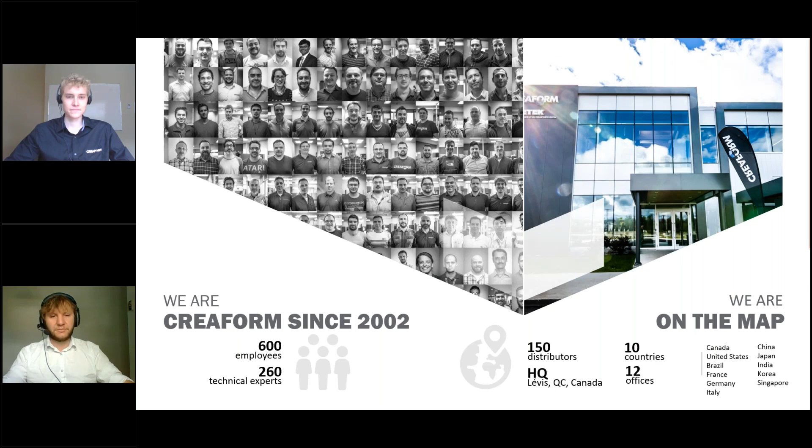And then in the other division, we have the metrology services, which Paul is part of. The metrology services deal with everything that touches inspection, quality control, 3D scan, things like that. And the last division, which is probably the least known, is the engineering services.

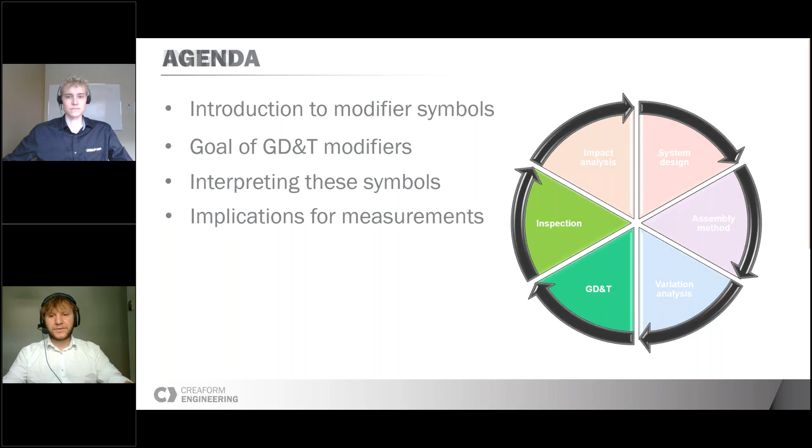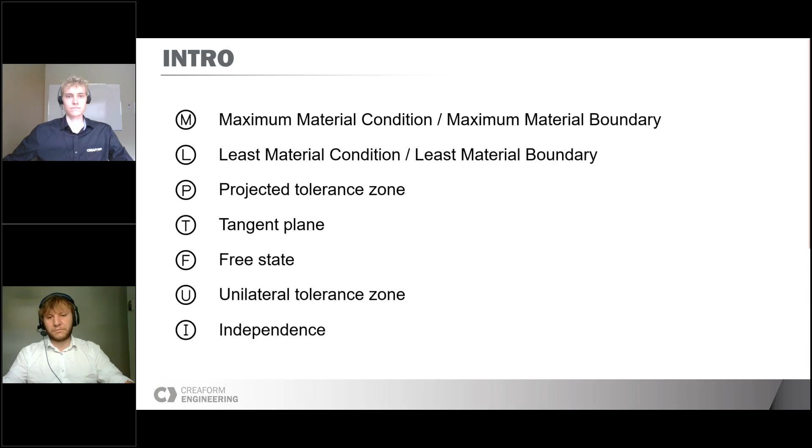As we spoke quickly in the first webinars, the reason why we insist on having a definition that is as exact as possible of our tolerance is because we want to avoid rejecting parts if they are good, and lose money, or we want to avoid introducing non-functional parts to the assembly line and potentially cause a production stop. So today we will focus on the two symbols at the top of the list, the maximum and least material modifier.

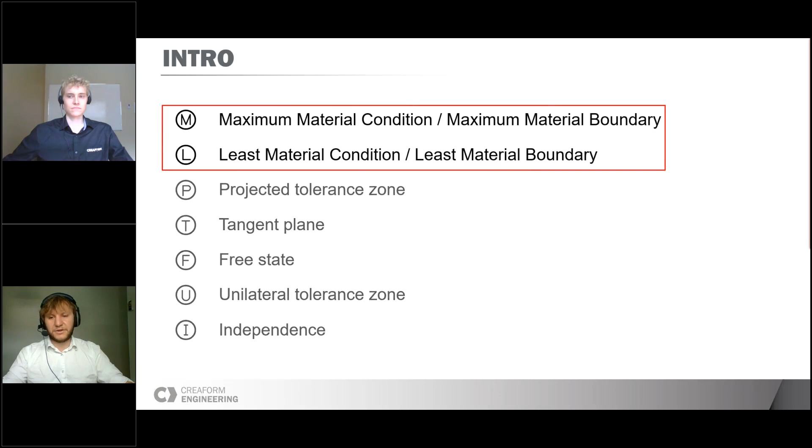We will look at them in detail using concrete examples during the presentation, but just to give you a starting idea of typical use case: the maximum material condition modifier will often be used to avoid a contact between 2 parts, so to avoid a clash. The least material condition modifier will mostly be used to protect the minimum wall of material that we want to keep at all time between 2 features of a part.

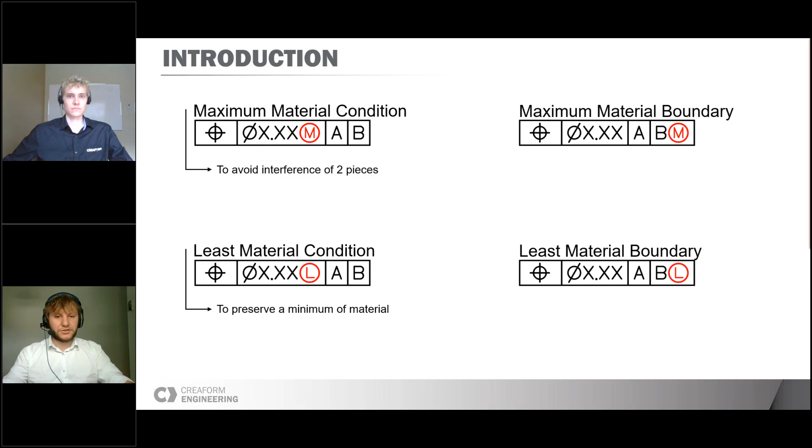The maximum material boundary, this one will be a bit different. We will use it when we have a datum on which we can attribute a size, like a hole or a groove, for example, and that we have the right to use the play that the size of the datum will create to better locate the part or best fit them during the assembly.

And the least material boundary is also when you have a datum that has a size, but this one will mostly be used when we want to protect a minimum of material around that datum. Said like that, for sure, it's still very abstract, but don't worry, it will become clearer as we go through the examples in the next slides.

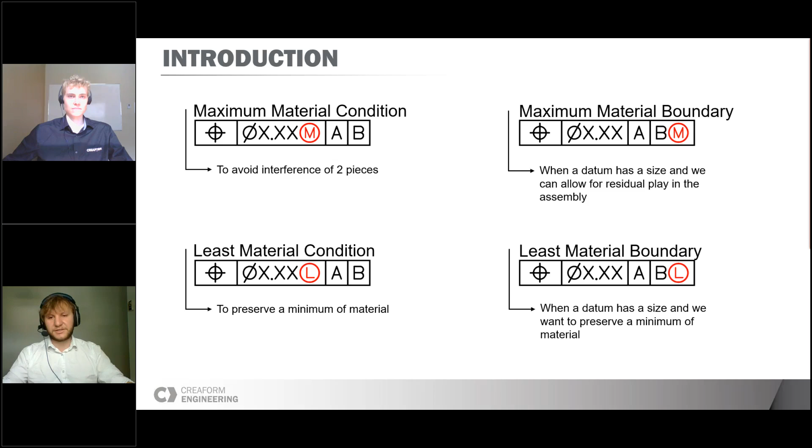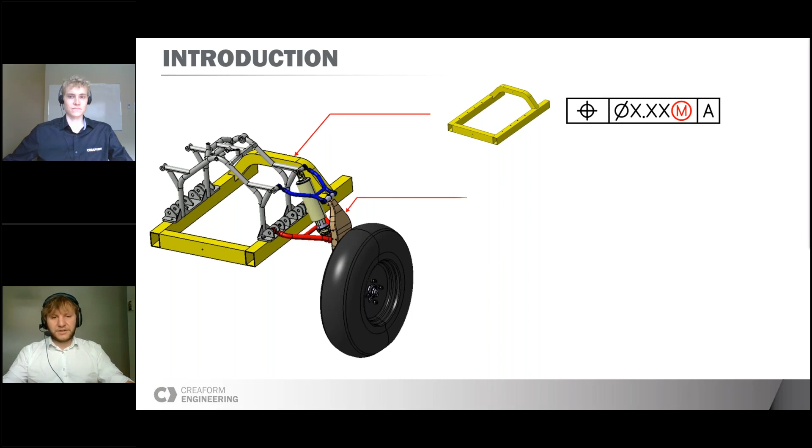To do that, we will once again use the same assembly that we used in the previous presentation, our ATV suspension. We selected 3 parts in the assembly that each present a typical use case of a modifier, and we will look at them one by one and explain every time the purpose of the symbol in each situation.

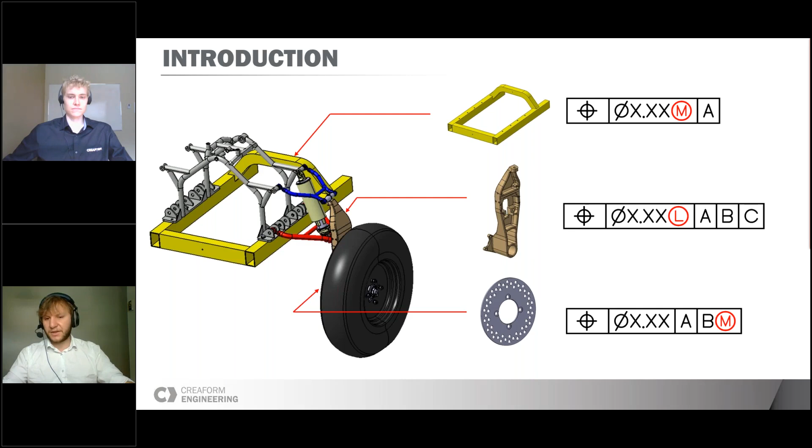So the first case that we have is the maximum material condition modifier. As we said a bit earlier, when the M symbol is attributed to the size of the tolerance zone, like we can see on the top right, it will often be to avoid an interference between 2 parts.

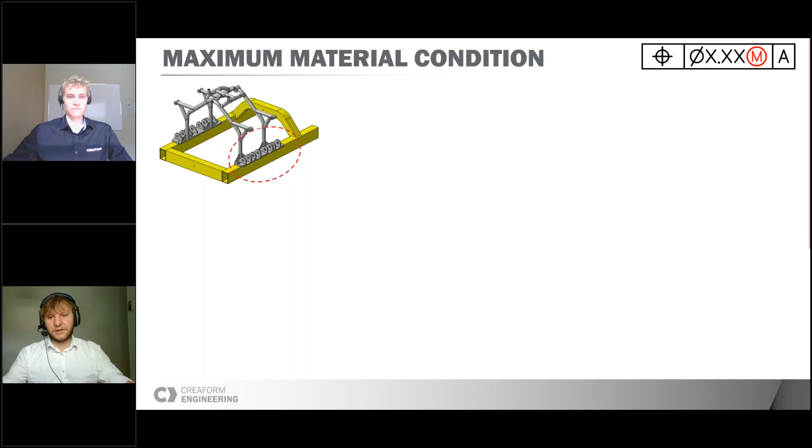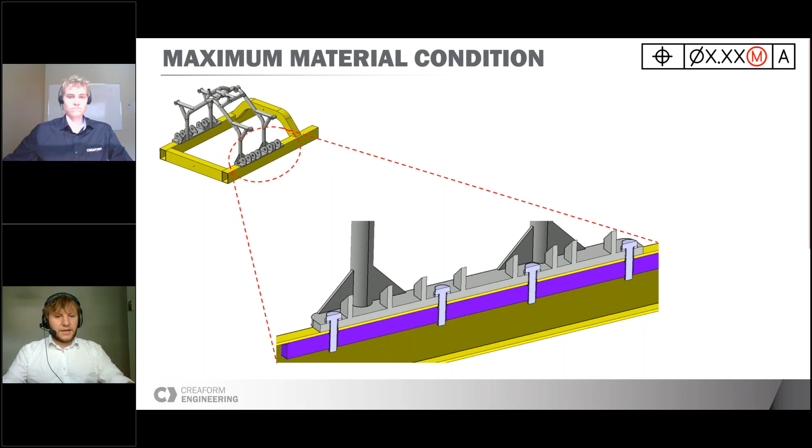To illustrate this, we will look at the hole pattern that makes the connection between the gray and the yellow part right here. The way that this interface works is that we'll ensure a contact between the gray and the yellow part using a tapping bar, so the purple part underneath. What we have to understand here is that only the tapping bar will have threads, and the other part on top will only have clearance holes to allow for the passage of the bolts.

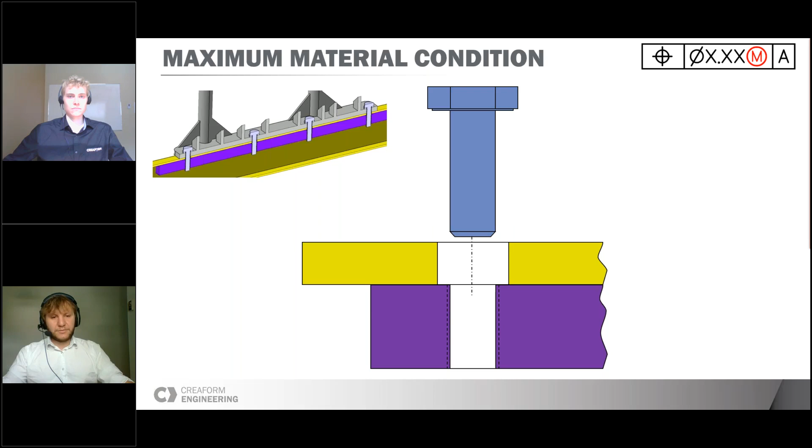So if we take a cross section, we see that what we just described is a quite common interface configuration where we want to clamp 2 or more parts together that have a clearance hole using another part underneath that has a thread. For this example, we will focus on tolerancing the clearance hole in the yellow part.

What we want to avoid here is to have a hole that is so out of position that it will create an interference with the bolt and prevent its installation. To avoid that, what we will do is define a position tolerance on the hole pattern. Concretely, what this tolerance box will do is define a cylindrical tolerance zone around the axis of the hole, and the size of the tolerance will be defined by the value that we put here in the tolerance box.

So once that is done, we will be sure that as long as the axis remains inside the cylindrical tolerance zone, we will be able to install the bolts. We'll never have a clash.

But the thing is, in real life, the diameter of the clearance hole will never be perfect. Sometimes it will be smaller, sometimes it will be larger. So let's look at an example where the hole is larger, like this. In reality, this means that we could allow for the hole axis to go slightly outside of the tolerance zone, like this, without creating an interference with the bolt.

So this is where the M symbol becomes interesting. What this symbol will do is create a link between the size of the hole and the size of the tolerance zone, in a way that the larger the hole will be, the larger the tolerance zone will be as well. In our case, it would look a bit like that.

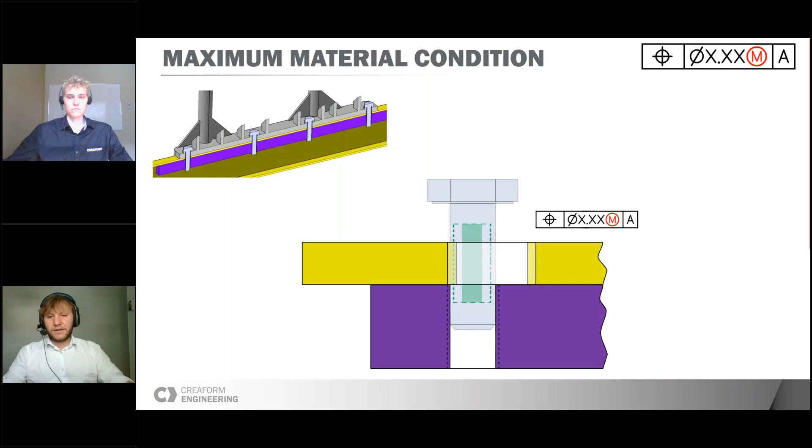So now that we understand the concept that the maximum material condition modifier will be used to create a link between the size of the hole and the size of its positional tolerance, we can add value to our example to see how it works in practice.

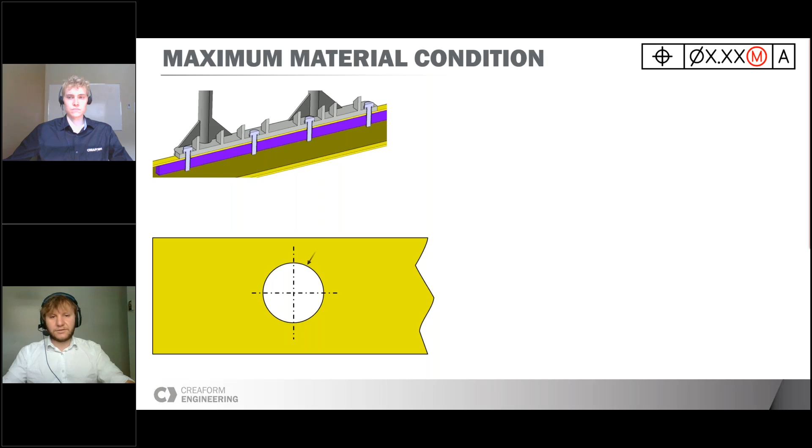Let's say the diameter of the hole is 11 millimeters plus or minus 0.25, and that we have a positional tolerance of 0.5 with the small MMC modifier. So what the symbol means is that the tolerance of 0.5 needs to apply when our hole is at its maximum material condition. In the case of a hole, we must be careful.

The condition in which there will be the most material on the part is not when the hole will be at its maximum diameter - it's when the hole will be at its smallest possible. So in our case, when the diameter of the hole will be at 10.75, this is the condition where we will have the most material on our part, and this is where the tolerance of 0.5 will apply. So that is what the symbol means.

Then the more the diameter of the hole moves away from our maximum material condition, the more the tolerance zone will enlarge. For example, if the diameter of the hole is 0.1 larger at 10.85, our tolerance zone will also be 0.1 larger at 0.6. This principle continues to apply until we reach the maximum diameter allowed by the tolerance on the drawing. So that's about it for the concept and theory of the symbol.

So I will now let Paul talk a bit more about the practical aspect of what the symbol implies for the inspection and control of the parts.

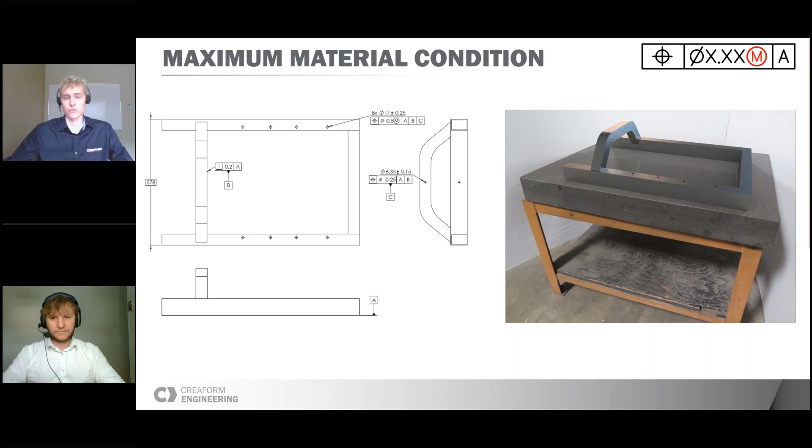Yeah, so here's what the real component would look like on the right side. And then on the left side, we see the 2D drawing, which we'd get, say, from the engineer or from a client, which would serve as the reference for our inspection. So let's zoom in a bit on the 2D drawing.

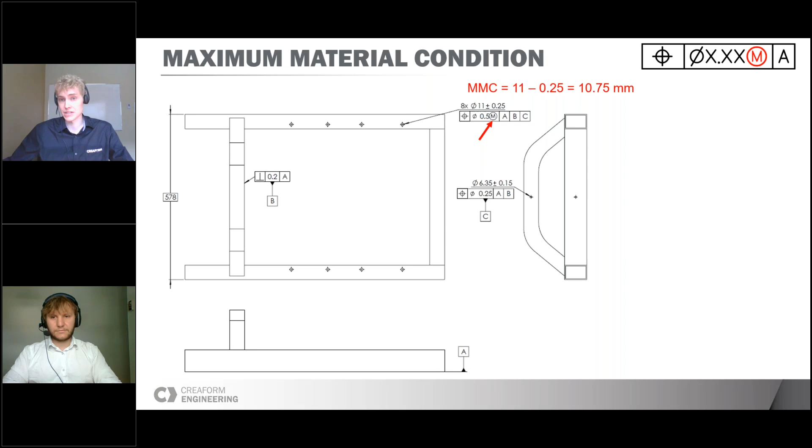And you'll notice on the top right, on the pattern of 8 holes here, we applied this MMC, or maximum material condition, for the position tolerance. And so as Cedric mentioned, we're able to calculate the hole at its MMC, which is when it's at its smallest diameter. So in this case, it would be 11 minus 0.25, so 10.75 millimeters.

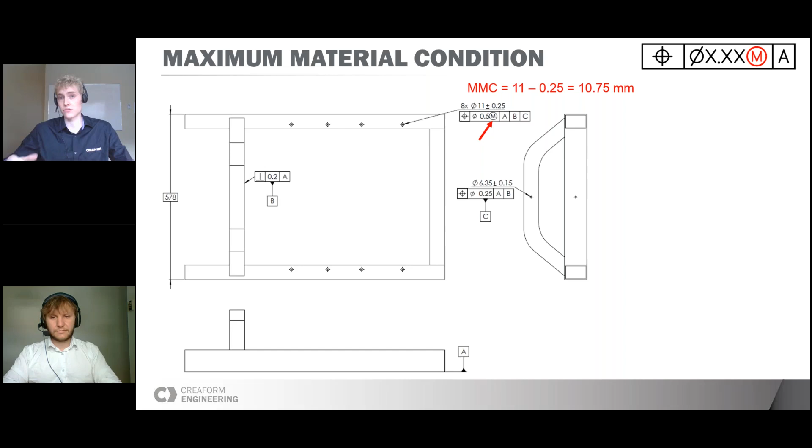And so this means that at 10.75, we're allowed a tolerance on the position of 0.5 millimeters. And as the hole grows bigger, and so goes away from its MMC condition, we gain proportionally some bonus tolerance on the position.

VX Inspect allows us to align the data, which can also come from probe points, but in this case it's obviously a scanned mesh. We can align it to the reference CAD either by best fit or via a datum alignment, such as is the case here. The interface of VX Inspect is fairly simple, and the reason for that is the philosophy of the software is to allow operators who may not have that much experience in GD&T to carry out inspections relatively easily.

So let's show this simplified diagram that we made just to better understand what's going on. Right now what you're seeing is everything in the perfect ideal scenario, so nothing is deviating. These dark blue pins would represent inspection pins that would be part of the inspection jig. In reality, holes 5 and 7 deviate both in diameter and position. And what we saw is that they were actually failing the inspection. It's a bit exaggerated here, but that's just to show visually what's going on.

Just remember that the diameters of the holes are acceptable, so the diameters pass because they fall within this 11 plus or minus 0.25 millimeter specification. The diameters are actually around 11.22. However, when we add the position callout, with a tolerance of 0.5 millimeters without any bonus, we need to increase the size of these pin gauges 5 and 7 proportionally. And so we see that the holes fail in this scenario.

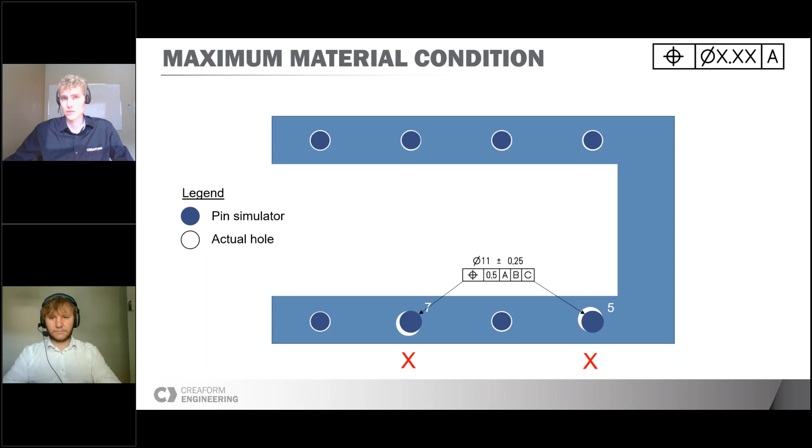So why do we need to increase the inspection pins in this case? It's because otherwise you'd allow the hole to move more than 0.5 millimeters out of position if you kept them the same diameter. In fact, the diameter of the pin should always be 0.5 millimeters smaller than the diameter of the actual or real measured hole.

So let's jump back to our VX Inspect module window. This time we added the M symbol in the inspection program. Notice that the deviations haven't changed at all, so all the numbers are identical to what they were. The X, Y, Z, the diameter, the deviation itself, nothing has changed in that regard. However, in this case, the holes do pass the inspection.

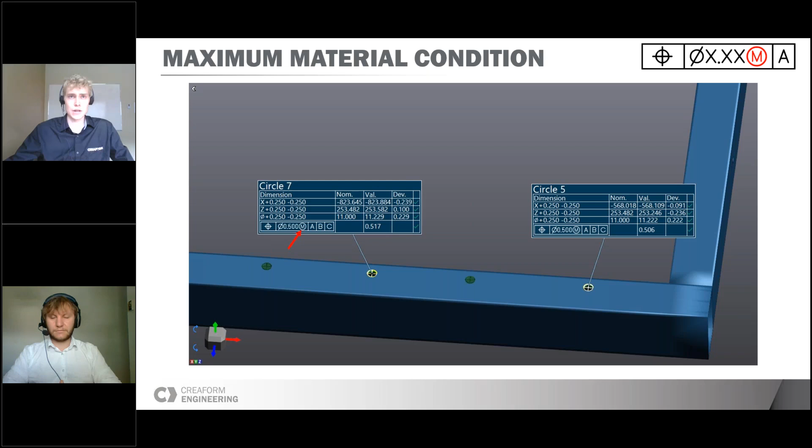That's because we now have a bonus on the position. You can see the bonus is around 0.47 millimeters, and the total tolerance is around 0.97 millimeters. Just to help you better understand where this number is coming from, as Cedric mentioned earlier, we can calculate this by subtracting the hole at its MMC condition, its maximum material condition, which in this case is 11 minus 0.25, so 10.75 millimeters. We subtract that from the actual measured diameter, which is 11.229. That gives us this bonus number, 0.479 millimeters. Add 0.5 to that, and we'll get the total tolerance of 0.97 millimeters.

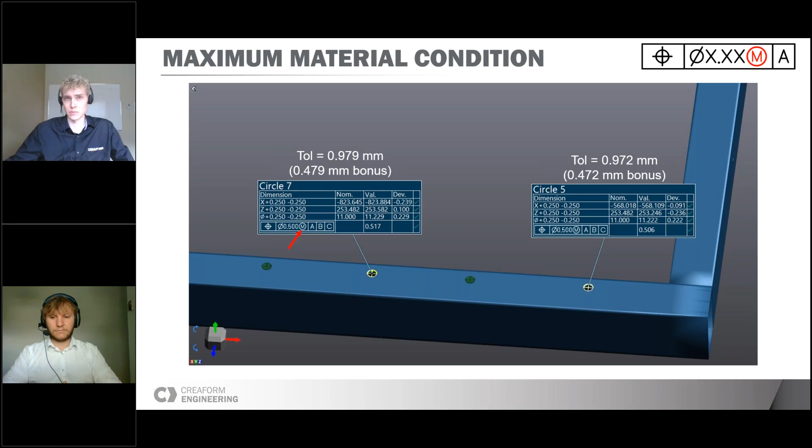So if we go back to the schematic here and look at our example again, this time we'll be adding the MMC. What happens when we add this MMC symbol is that all the inspection pins now shrink down, they narrow down in diameter to the virtual condition of the holes.

And what we mean by virtual condition, we can calculate it here. In this case, it would be 11 minus 0.25, so the MMC of the hole minus its positional tolerance at MMC. So 10.75 minus the 0.5, which gives us a 10.25 millimeter diameter pin. That's what the virtual condition of the hole is.

And so now we can see visually that these holes do pass the inspection. And so the good thing about MMC is that it often gives us the possibility to use rigid physical jigs to inspect the parts, because once the drawing is specified, the virtual condition of the holes and features in general, they don't change.

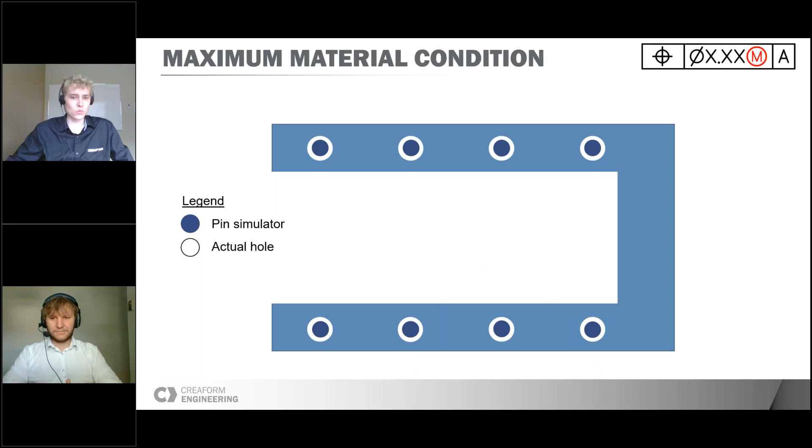Now, a word of caution is that sometimes we want to avoid MMC. So for example, here, in this case, we would introduce maybe a bit too much imprecision or inaccuracy in the assembly. And so it's always essential to define the functional role of a part early on in the design and better understand if you're able to allow for extra play or not in the assembly. And if not, obviously you'll leave out the MMC.

And so that pretty much wraps up the first example of maximum material condition. So I'll pass it back to you, Cedric. Thank you, Paul.

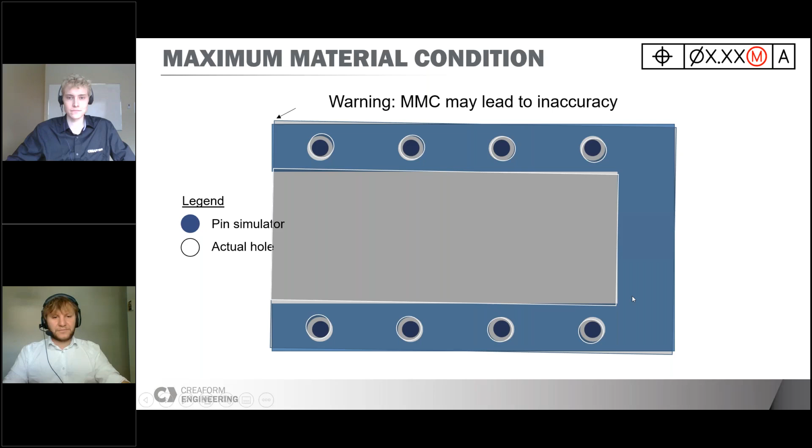So next one, our next example will be the least material condition modifier. So if you remember what we said at the beginning, a typical use case for that symbol is to protect a minimum wall thickness on our part.

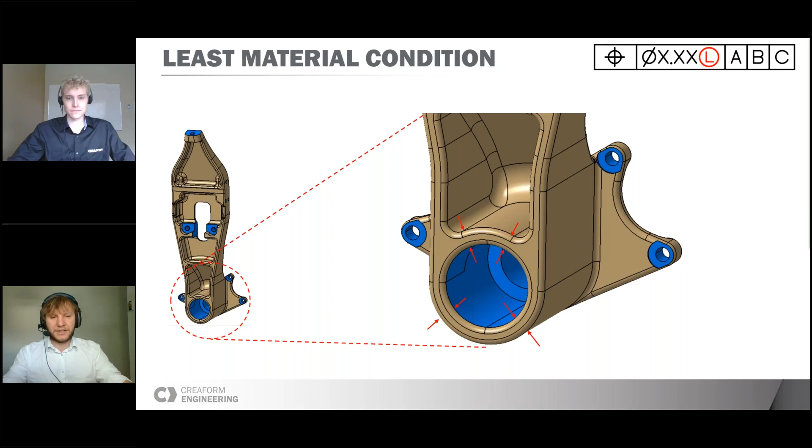So what we have in front of us is a casted part with some machine surface being shown in blue. And what we want to ensure in that example is that a minimum thickness of material is always present between the big machine diameter and the outside surfaces of the casting.

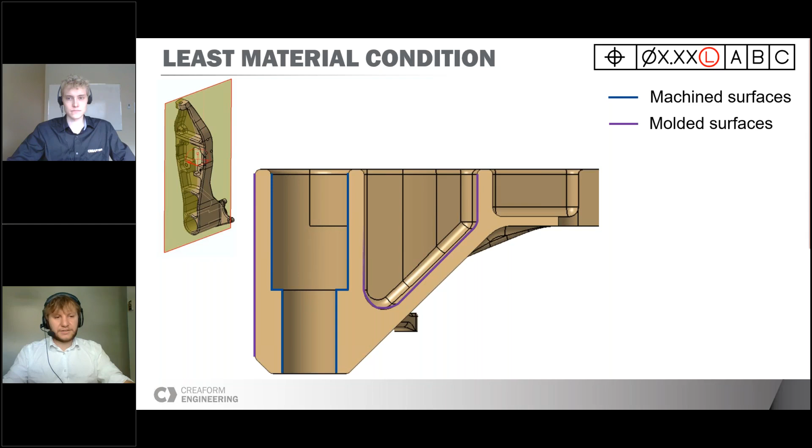So to better understand what is happening, we will make a cross-section of our part like this. We will then trace in blue the machine surfaces, in purple the casted surfaces, just to better see them. And we will also illustrate the minimum thickness of material that we want to protect at all time in red hatching, like this. So we already know that the casted surfaces will deviate. This is something that will happen and there's no way to avoid it.

But the feature on which we want to focus today is the machine hole, the positioning of the machine hole. So to control the position of this hole, we will once again use a positional tolerance box. So as in the first example with the clearance hole, that requirement will define a cylindrical tolerance zone around the axis of the hole. And we can define the size of the tolerance in a way that will ensure us that as long as the axis of the hole remain within its tolerance zone, the minimum wall thickness won't be affected.

But once again, in real life, a hole with a perfect nominal diameter is not something that exists. So in this case, we can imagine that the hole diameter is smaller than nominal, which will look a bit like this. So when we do this, we quickly realize that the position of the axis can leave a little bit the defined tolerance zone without necessarily affecting the wall thickness that we want to protect. And this is what the L symbol here will authorize.

So when we write the L symbol beside the size of the tolerance zone in our tolerance box, that will mean that the smaller the diameter of the hole will be, the larger the tolerance zone will be. So as you probably understood, this is exactly the opposite of the M symbol that we had in the previous example.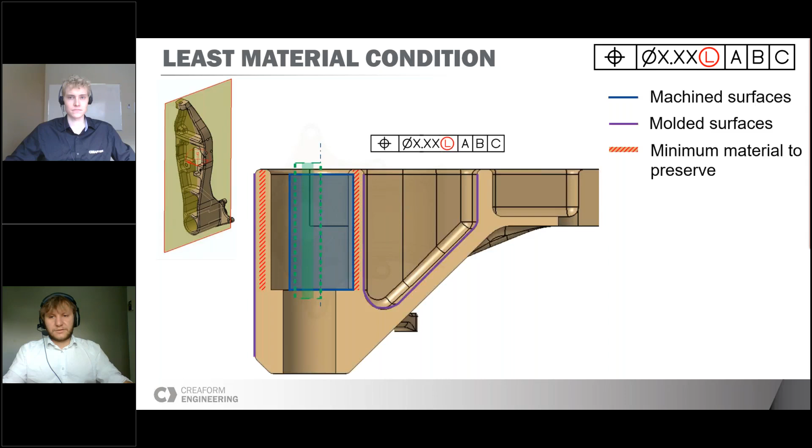So, a bit like we have done in the previous example, we will now attribute some value to our tolerance. So let's say that the diameter of the hole is 50 millimeter plus or minus 0.25, and that we have a positional tolerance of 0.2 with the small L modifier.

So what this means is that our tolerance of 0.2 needs to apply when the diameter is at its least material condition. So for a hole, once again, we must be careful: the minimum material condition is not when the hole is at its minimum diameter. So the situation where we will have the least material on our part is when the hole will be at its largest diameter.

So in our example, this means that when the diameter of the hole is at 50.25, this is when we will have the least material on our part, and this is where the tolerance of 0.2 must apply. So it's the same thing as with the maximum material modifier we've seen already. The further we move away from that diameter value, the larger our tolerance zone will be.

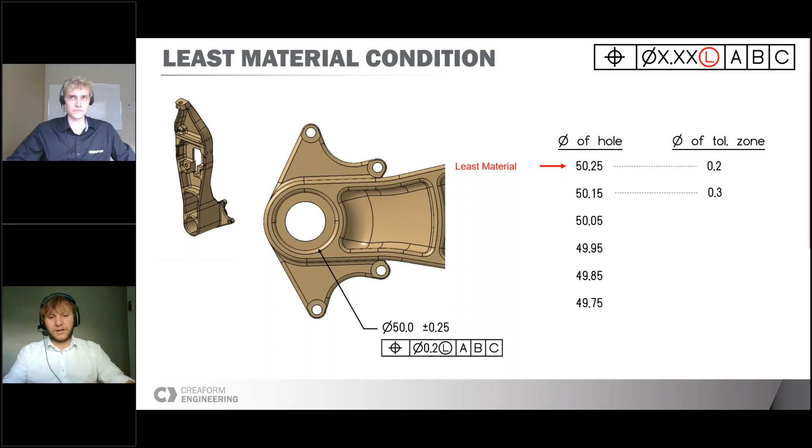So if the hole diameter moves away from the minimum material value by 0.1, for example, and becomes 50.15, our tolerance zone will enlarge by the same amount, so 0.1, and become 0.3. The size of the tolerance zone will continue to grow relative to the diameter until we arrive at the minimum diameter authorized by the drawing.

So again, I'll turn it over to Paul to talk to us about the practical side of this interpretation.

So again, we'll conduct a real analysis on this component using this 2D drawing on the left. If we zoom in on the drawing, we'll notice that on the bottom right-hand side, we apply this L symbol, the LMC symbol, to the hole with the 50 millimeter diameter. And as Cedric mentioned, we can calculate the least material condition of the hole when it's at its largest diameter.

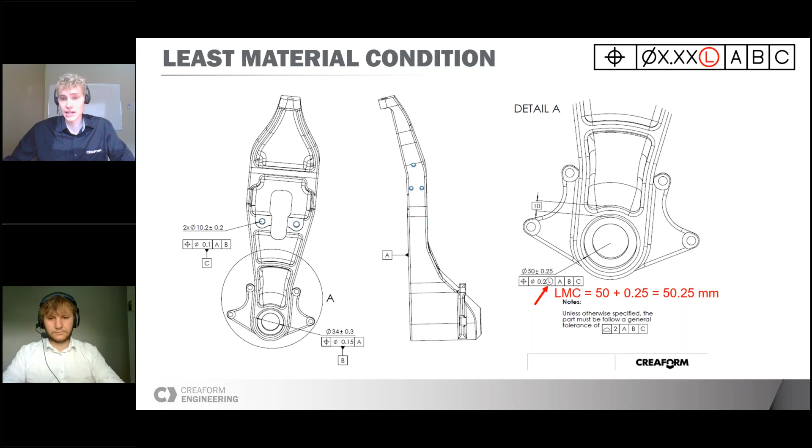So in this case, it would be 50.25 millimeters. And at its least material condition, this means that the hole would have a maximum positional tolerance of 0.2 millimeters. And as the hole shrinks and gets further away from its LMC, we are able to gain a bit of bonus tolerance on its position.

So once again, let's jump back into our VX Inspect window. We'll first examine this example without the LMC symbol. As you can see, there's no L applied, so we're just in the regardless of material condition for now. And we can see that the value of the deviation is 0.4 millimeters, and of course that exceeds the maximum tolerance of 0.2 millimeters. That's why we have this red X, because this part is currently not passing the inspection.

And of course, we exaggerated it once again, just to show you visually. And keep in mind, again, that the diameter does fall within tolerance. So the diameter of the hole is within this 50 plus or minus 0.25 specification. In fact, it's around 49.76 millimeters. So the diameter is okay.

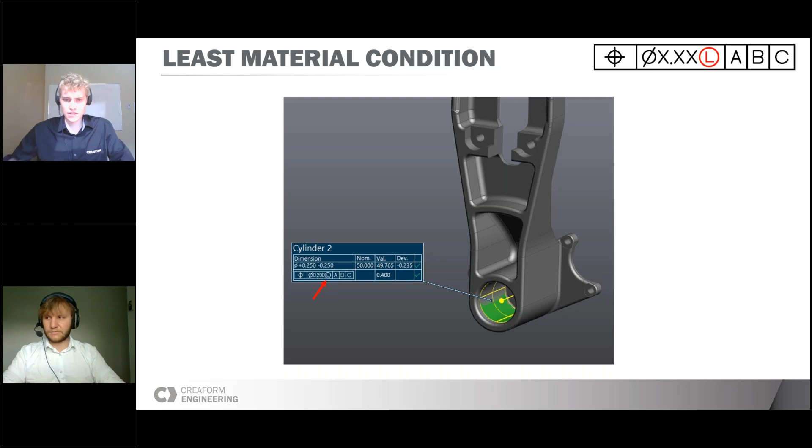So if we go back to our VX Inspect window, this time we did add the LMC callout, as you can see, the least material condition. And notice also that none of the numbers have changed. So still the same position deviation, still the same diameter. So all of that is exactly the same.

But now that we have this bonus tolerance, the same part that was otherwise failing previously now passes the inspection. And the bonus itself is 0.485 millimeters. And that actually comes from the difference between this real measured value, which is 49.76, and the LMC condition of the hole, which in this case would be 50 plus 0.25, so 50.25. So 50.25 minus 49.76 gives us this bonus. And then the total tolerance, we add to that this 0.2, which is the base tolerance for this position callout.

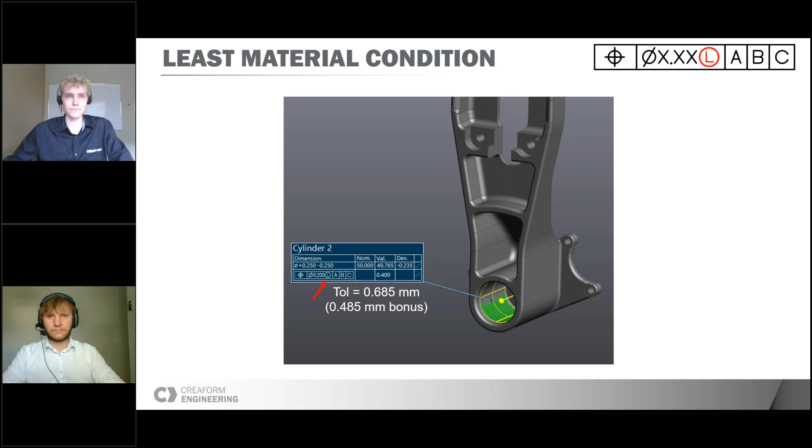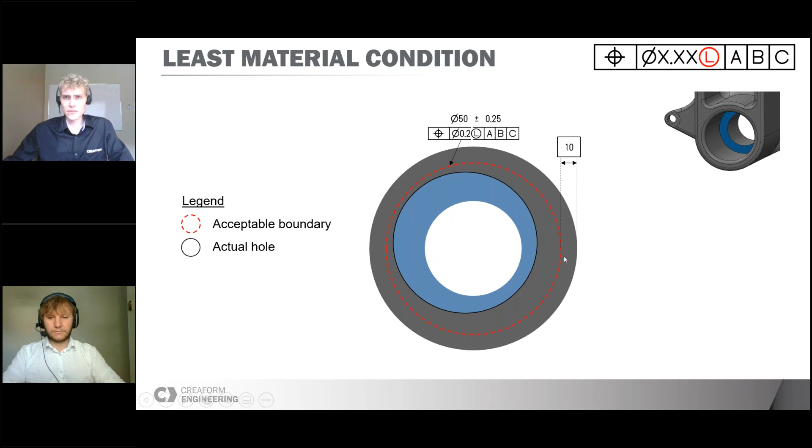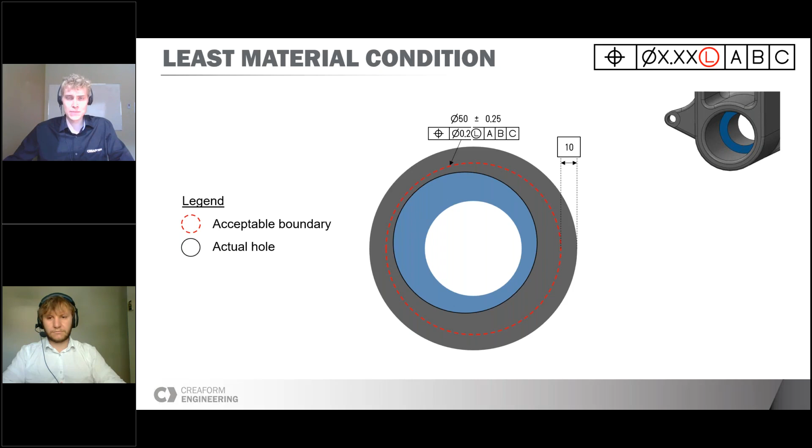So let's go back to the diagram once again with our new situation. Still the same hole, still the same thing going on, but now that we've added this LMC callout in the box, we now give ourselves this constant safety net around the boundary of the part. And so as long as this hole doesn't exceed the boundary while still maintaining an acceptable diameter, then the hole would pass the inspection.

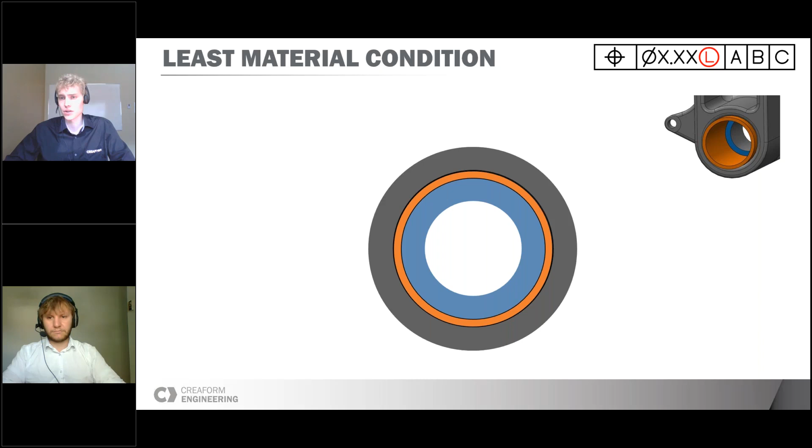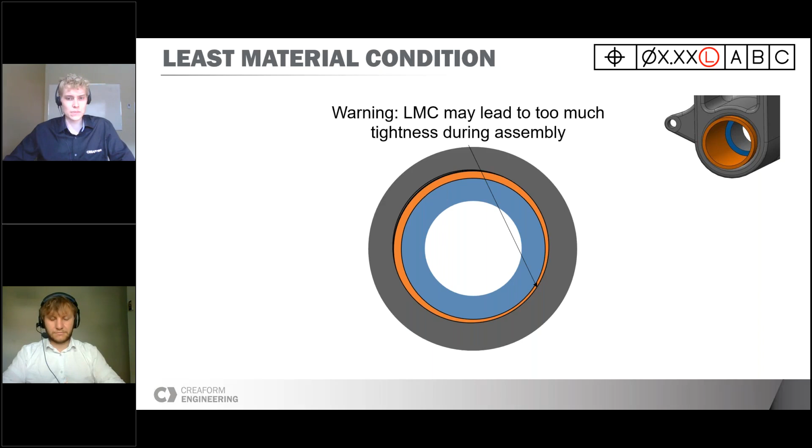So again, a word of caution with LMC. Sometimes in a case where you want to ensure an easy fit between two components, you'd want to avoid using LMC, because this modifier doesn't guarantee any clearance, and we could end up with quite a tight fit, as you can see here. For instance, the orange tube would have quite a hard time sliding into the part's central hole. Keep in mind that LMC is used a lot less than MMC in drawings, so you have to be a bit more careful applying it. That wraps up what we had to say for the least material condition.

Let's look now at the last practical scenario. Thank you, Paul. Our third and last example will be a bit different, because as you can see in the top right corner, this time the symbol will be applied to a datum instead of being applied to the tolerance zone like we saw in the two last examples.

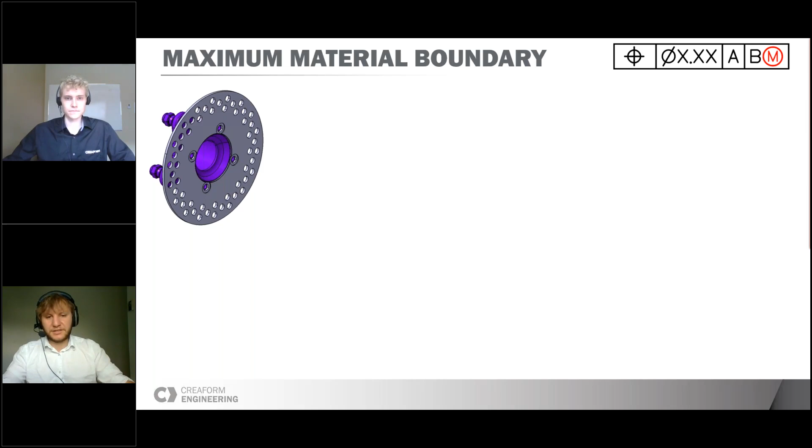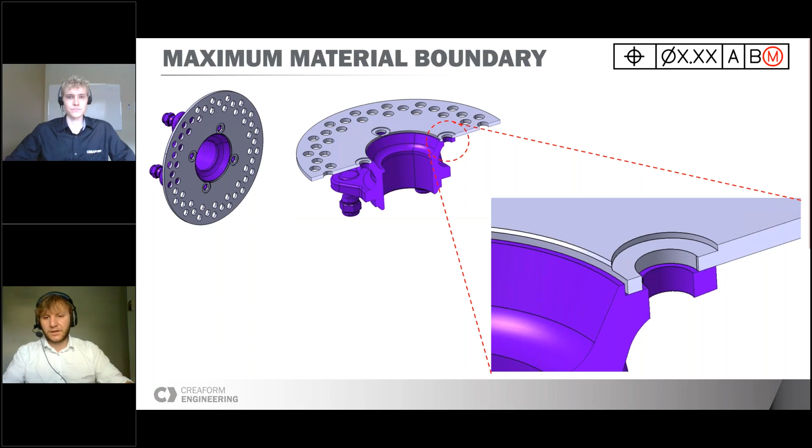To illustrate this, we've chosen to use the assembly between the wheel hub and the brake disc. To understand how the disc is installed on the hub, we'll make a section and a zoom like this. What we see is that the disc in gray seems to be located by the big diameter in the middle, and then we have a pattern of 4 holes that will serve as clearance holes for the passage of the bolts that will screw into the hub and clamp the two parts together. Schematically, it would look a bit like this.

First, the disc will be placed on the hub like this. Now what is locating the disc from left to right is the big diameter at the center. It seems a bit strange to say that the big diameter is locating the part given what we're seeing on screen, because there's a lot of play between the two parts. In real life, the fit between the two diameters will be a lot tighter, which is important if we want to use this feature to locate the part. But in this case, we voluntarily increased the gap between the two parts just to illustrate the concept.

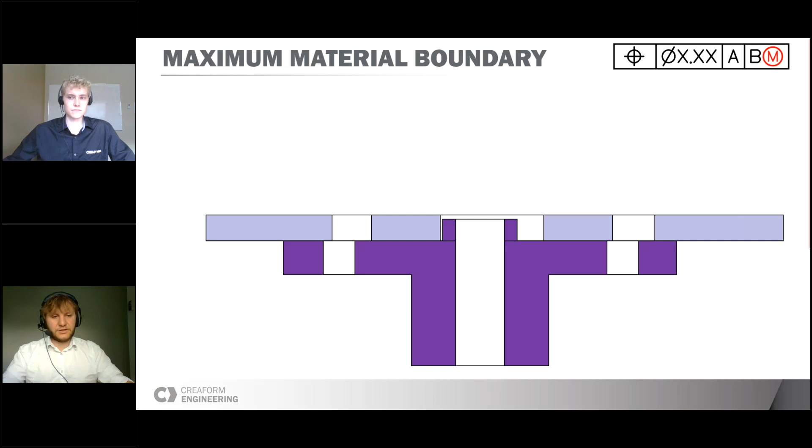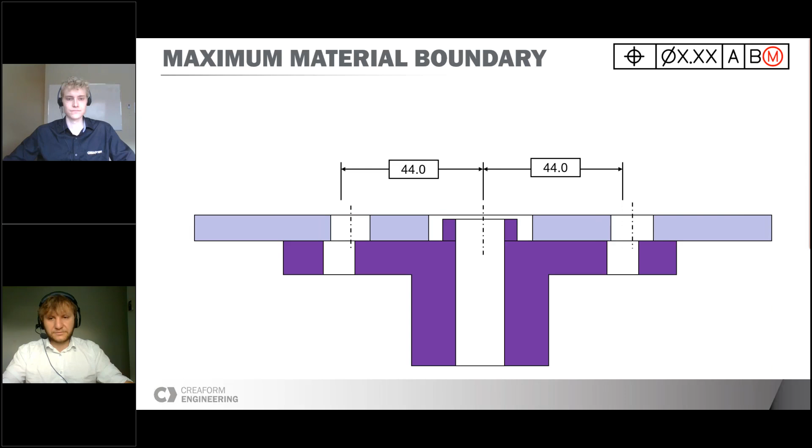So now, once our two parts are in contact, nothing is preventing us from using the play between the two datums to slide the gray part and align the hole pattern in order to install the bolts. So what this means for positioning the hole pattern in the gray part is that if all of the holes are offset by the same amount in the same direction relative to the datum, a bit like this, we will still be allowed to use the residual play between the datums to try and realign the bolt pattern of the two parts, which would look a bit like that.

The thing we should not forget when we do this, on the other hand, is that the size of the datum can still vary. So we understand that the smaller the datum will be on our gray part, the less play we will have available to come and reposition the parts.

And also, in addition to that, our datum could also have an orientation error. The hole could be produced at an angle relative to the contact surface and look a bit like that. Now we can clearly see that an orientation error will also reduce the play that we might have available to realign our parts.

So what we need to understand here is that, contrary to the other examples, when the symbol is applied to the datum, it won't necessarily translate directly to a bonus tolerance on individual holes. Instead, it will allow us to move the whole part around and try to best fit all the requirements using the residual play created by the size and orientation of the datum. We should not forget that when determining the amount of available residual play, we must consider not only the size of the datum, but also its orientation.

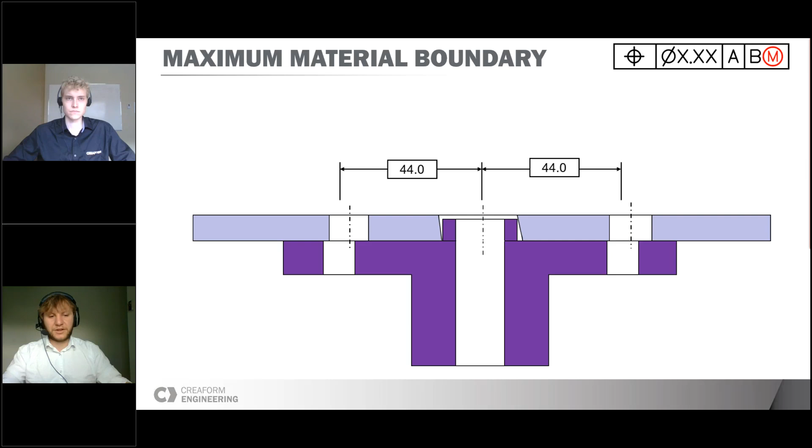As Cedric was saying, this represents the maximum material boundary, and we can calculate the value of this boundary. It's essentially 73 millimeters, the nominal diameter of datum B, minus 0.5 millimeters, its tolerance on diameter, minus 0.5 millimeters again, the tolerance on position.

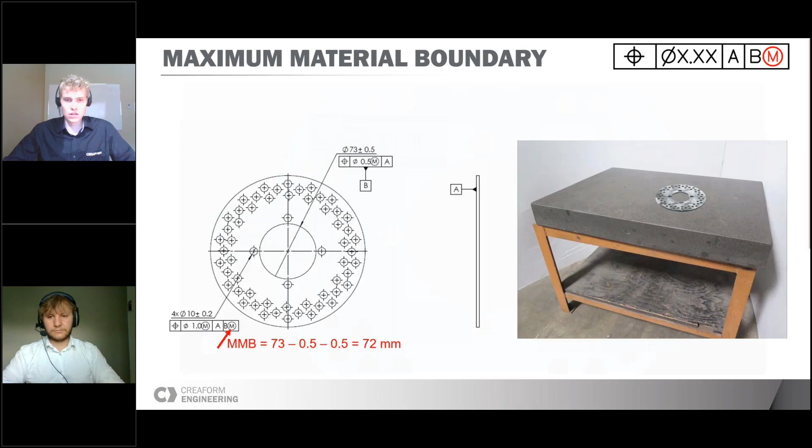And so we get this number, 72 millimeters, which is the virtual condition of that datum B. So let's jump into our VX Inspect software once again. Here, as in the previous examples, we're comparing the scan data of the physical parts to the nominal CAD. Right now we are omitting the M symbol, so we're just going to look at the example regardless of material boundary.

So in the default condition, notice that all the holes currently are failing because they deviate more in position than their allowed tolerance of 1 millimeter. This one, for instance, is deviating 1.2 millimeters, so they're all failing the inspection. Notice also that their diameters are all within acceptable ranges, falling within 10 plus or minus 0.2. So we have a few holes that are bigger and some that are smaller.

Following the same logic as before, we'll show you a more simplified diagram of what's going on in this scenario. First, we'll show what's going on without any modifier, so no MMB. We see that in our case, the real measured holes deviate somewhat in position and in diameter from the perfect ideal scenario, as we can see here.

Now we also need to adjust the pin simulators proportionately to the diameter of those real measured holes when we add this positional GD&T callout. So a couple of them will widen according to the holes, and a couple will narrow down. At this point we can see the inspection obviously fails.

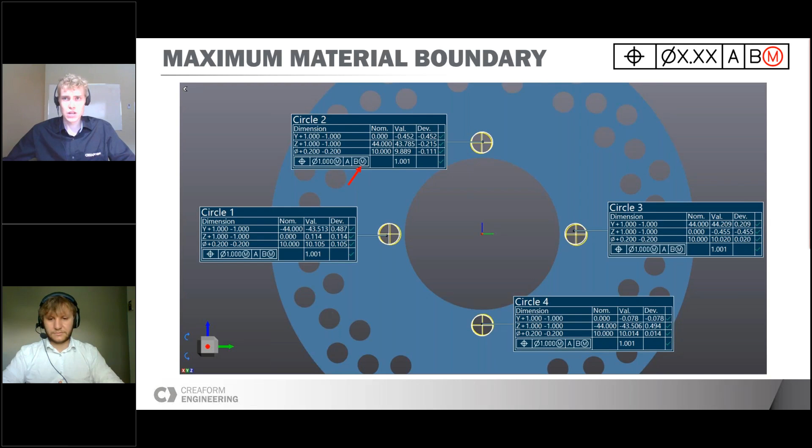Now, if we jump back to our case in VxInspect, this time we're going to add the maximum material boundary callouts on all four circles, as well as MMC in this case. Cedric touched on this briefly, but I'll repeat it to make it clearer: the MMB applied to datum B does not add any numerical bonus value to the tolerance. So all the bonus, which for example in the case of circle 1 is 0.305 millimeters, is coming strictly from the MMC applied to the position.

If we want to calculate it again quickly, as we did in the first example, we find the MMC condition of the hole, which is 10 minus 0.2, so 9.8, and subtract that from the measured value of the hole, 10.105. That's where we get this 0.305 millimeter bonus. The total tolerance adds just 1 millimeter, the base tolerance. So all the bonus is coming strictly from the MMC, not the MMB. In fact, if we were to remove this M symbol from datum B, we'd still have the same bonus value.

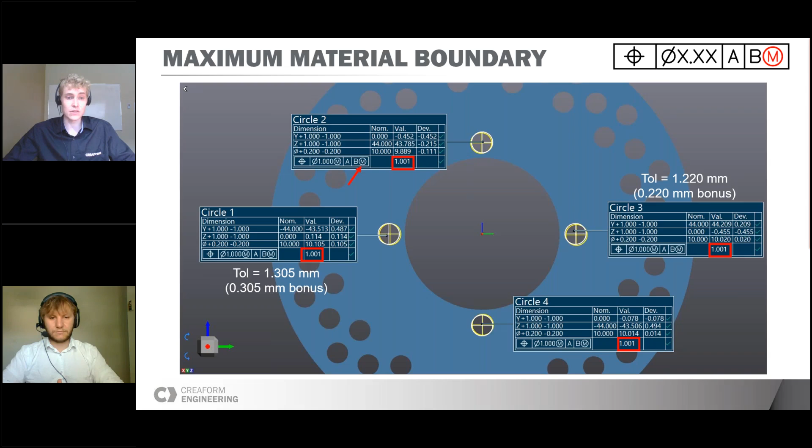Now, if you were paying attention, you might have noticed that the position values have changed in this example, and all the X, Y, Z values have also changed. That's because this modifier on datum B allows us to shift the position of our real measured data relative to the datum reference frame. If I show you a quick animation, you'll see the effect of the alignment shifting as we allow this extra play coming from the datum B, thanks to the MMB datum modifier.

Now, obviously, in that example you just saw, it's not deviating that much because the real deviation is less than a millimeter. But that shows you a bit what's going on in the actual software as we apply this MMB to datum B.

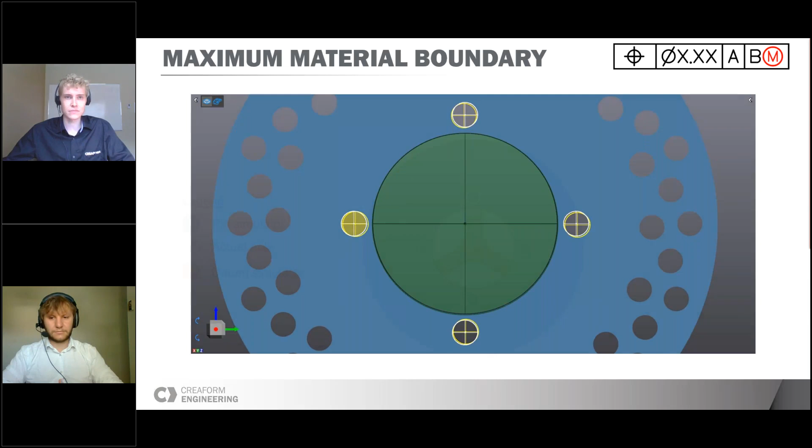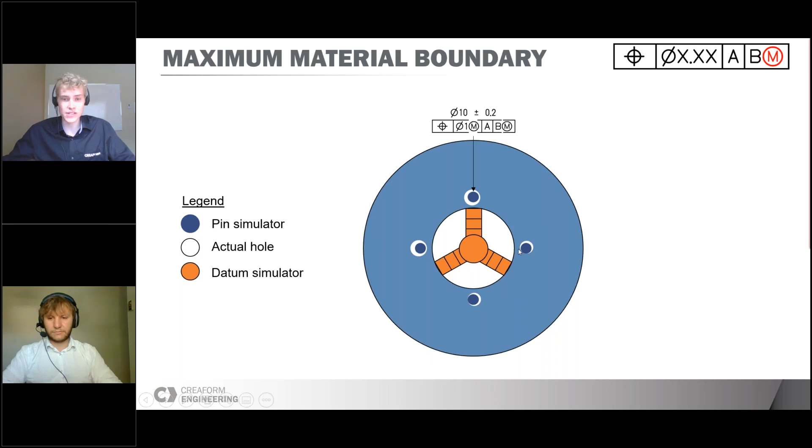So let's go back to the schematic with the real holes deviating. Now, thanks to the MMC symbol, this allows us to manufacture the inspection pins at the virtual condition of the holes. And then with this modifier on datum B, the MMB, it allows us to simulate a datum which is fixed at its virtual condition, which we calculated earlier to be 72 millimeters.

So if you take a look at this little animation, it shows how it gives us play to come and refit the part relative to the inspection jig. And so now the same holes that previously were not passing inspection now pass inspection thanks to these datum modifiers.

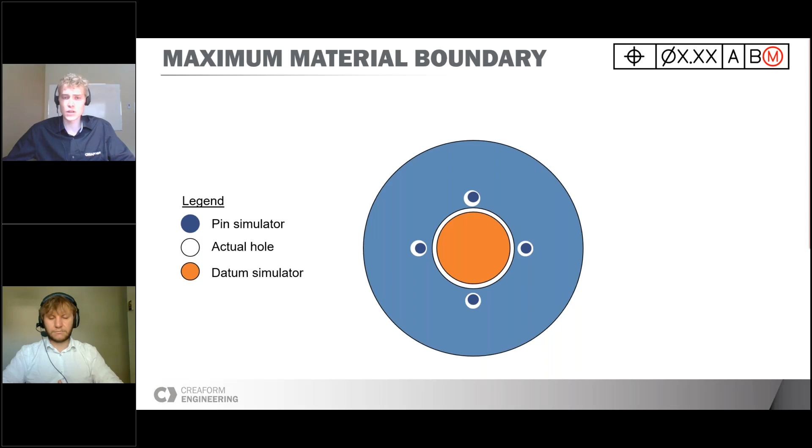Again, we want to be careful sometimes because in certain assemblies we can't afford to have this imbalance, say on a central axis where a part might be rotating at high speeds. So again, it's always necessary to establish the functional definition of a part even before thinking of using any GD&T modifiers. That pretty much wraps it up for that last example.

So to recap what we saw today, we use GD&T modifier symbols to optimize the number of parts considered acceptable without sacrificing their functionality. And it's always critical to define a component before deciding to apply these symbols.

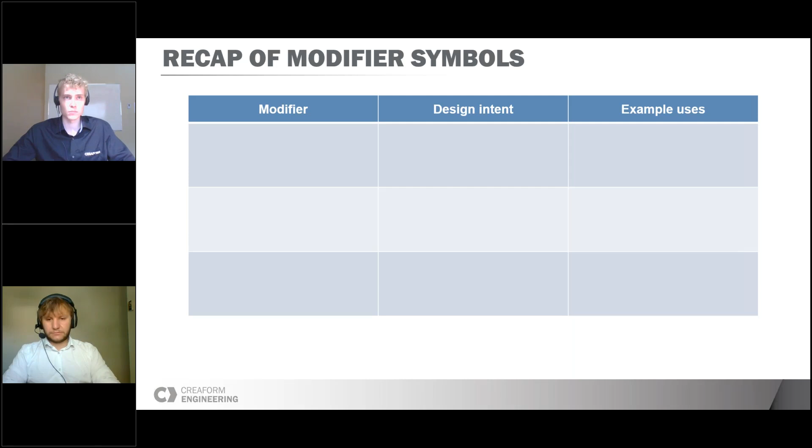So first we saw the maximum material. In general, this modifier makes assembling easier, and we use it often for clearance holes and clearance fits. For instance, it's used often for assembly hole patterns.

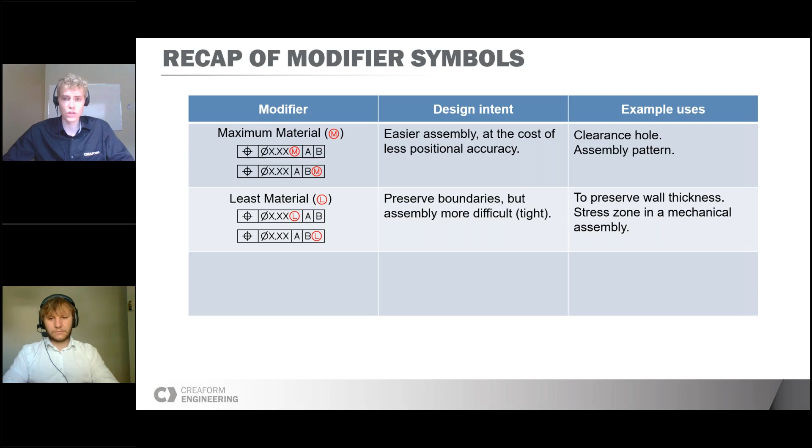Next, we touched on the least material. In least material, this is usually used when we want to preserve a certain boundary. And like we mentioned a couple times, it's used a lot less frequently in drawings, but it still has its uses, especially maybe in a stress zone of a mechanical assembly where we want to preserve a certain wall thickness.

And last but not least, by default, we have what we call regardless of feature size or regardless of material condition. That's when there are no M or L symbols applied to the tolerance. So in general, this is more restrictive, but at the same time, it's a bit more conservative. And in this case, the position and the size of the feature are independent.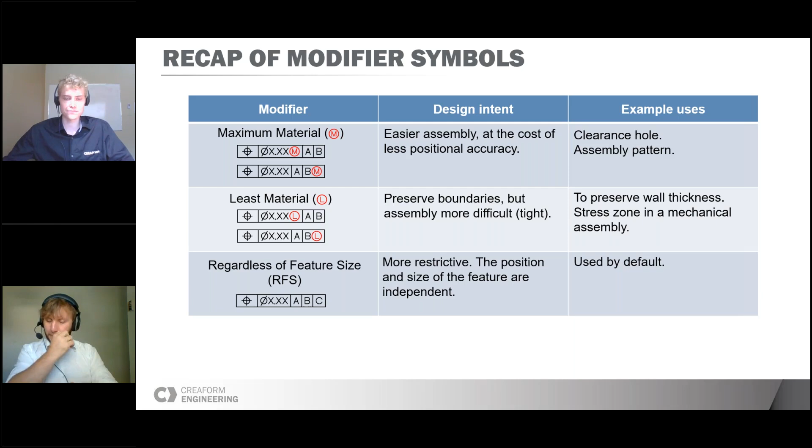So to conclude, what did we see today? First of all, poor geometric definition may lead to rejecting parts that are actually functional. So it's always important to define the function of a component early on in the design stage.

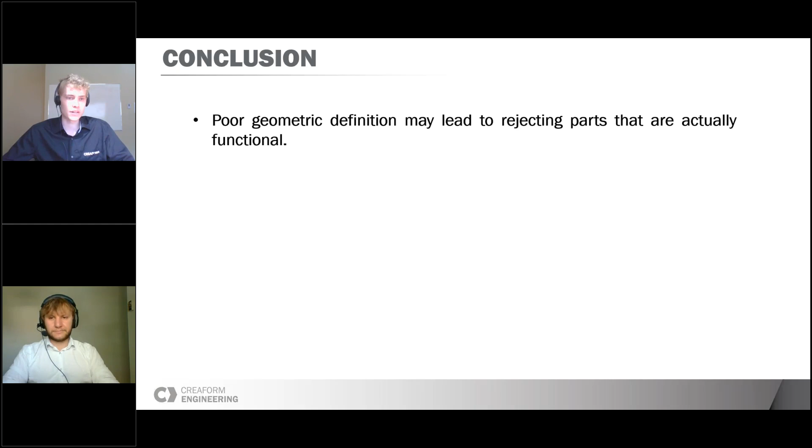Next, we saw that with modifier symbols, we can clarify the practical definition of a part or an assembly. And so it helps us understand what's going on, practically speaking, in the drawing.

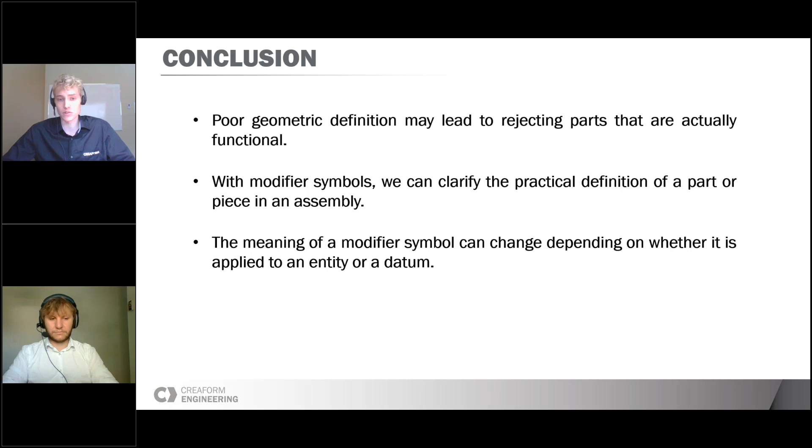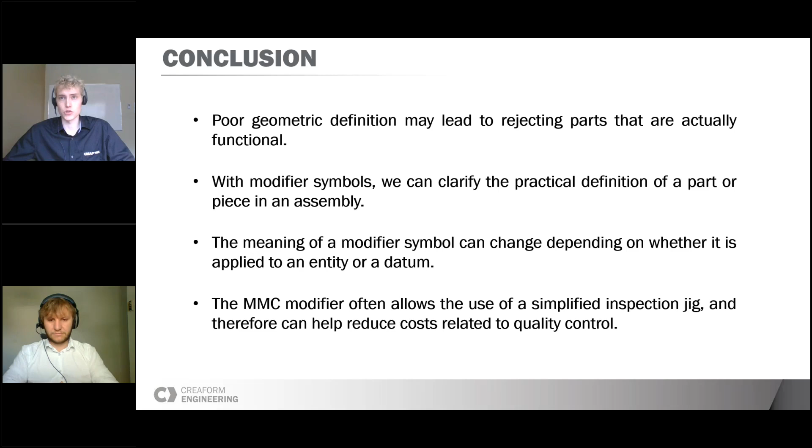We also saw that the meaning of a modifier symbol can change depending on whether it's applied to an entity or a datum, as we saw in the case of MMC versus MMB. And finally, in the case of MMC, it often allows us to use physical inspection jigs, which can help reduce quality control related costs.

So that concludes the main presentation on GD&T modifier symbols today. We hope this was useful for clearing up any confusion around certain topics that are not always so intuitive.

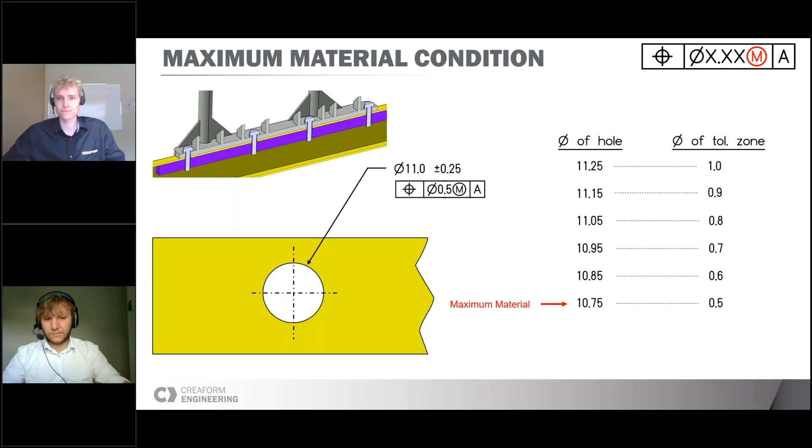So in some cases, like on the shop floor, maybe you're confident in drilling precisely located holes, but you're not as confident in drilling the proper diameter of a hole. So you can shift tolerances between diameter and position. Essentially zero at MMC would give you the maximum number of parts that could pass inspection without compromising their functionality. But that also means if you're at the minimum diameter, 10.75, you'd have to have perfect precision on the location of the hole.

I have another question here. Someone is asking about an example for the LMB situation. Yeah, the L modifier applied to a datum - that's one we didn't cover. That's true, LMB is quite a bit more rare than LMC and obviously MMC, MMB. Sometimes we use it to maintain a certain wall thickness, say for a sleeve feature. And the other thing to keep in mind is that I have the LMC and example LMB there.

So this is an example of a sleeve where we want to conserve that minimum wall thickness going around. It's pretty rare - have you seen it that many times in your experience, Cedric? An LMB on a drawing? I almost never seen an L on a datum, but I think that's one example where we could have it. Let's say we have a datum that is on a diameter like this. If the datum is at its smallest, this is where we have the tolerance, and as it becomes larger, we give more play on the positioning of the parts to achieve the tolerance that we have here. So that would result in a certain wall thickness that will be maintained at all times between the inside diameter here and the outside diameter here.

One thing I'll add regarding LMC and LMB is that you can't really inspect it with a physical gauge, as is the case with MMC. Usually you can only calculate it using mathematical methods or through software, and that's even specified in the ASME documentation itself. So it's a bit more difficult to inspect - you can't really do it with a physical jig.

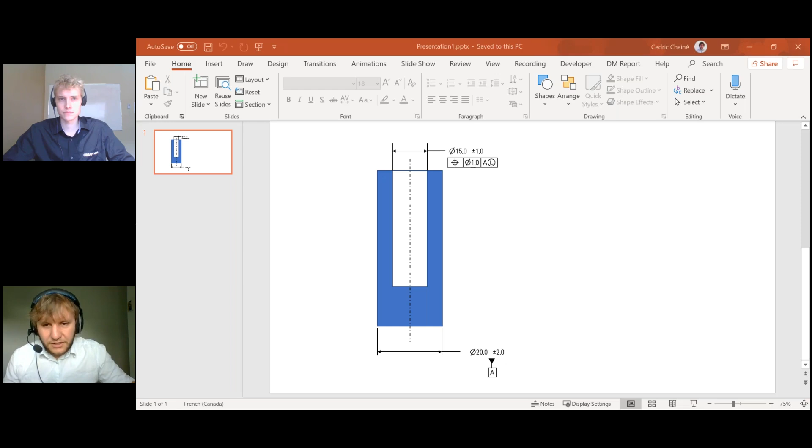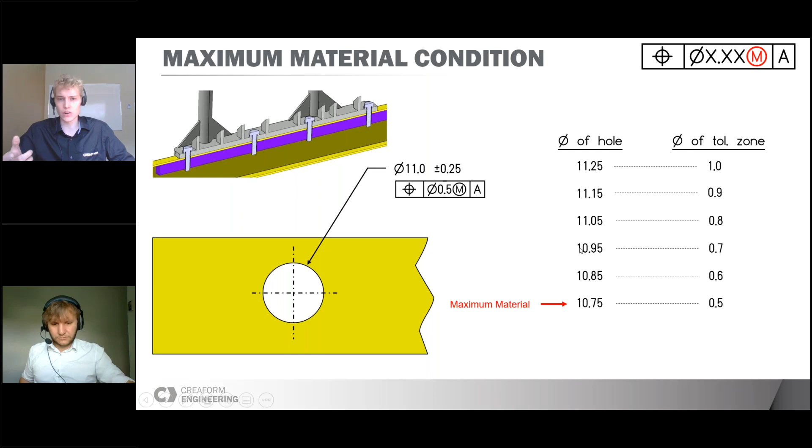Another question that just came in: does calculating tolerance using MMB require software, or can it be done by hand? Well, I think it can be done by tooling, using a gauge. So we showed, for example, in the third example - you can have an inspection jig with inspection pins and fit it on and see if it fits. And also for datum B, you can simulate it. In software, often what happens is that it simulates these datums, but you can obviously do it in real practical life as well.

Especially with MMC and MMB, it allows you to create these pins which have a fixed diameter at the virtual condition of the holes. So you already know just based on the 2D drawing what those diameters are going to be, and you can manufacture an inspection jig without actually knowing how the real part deviates in reality. Whereas without MMC, if you're just inspecting with no M symbol, those inspection pins would have to increase or decrease in diameter depending on the actual measured holes. So not as convenient.

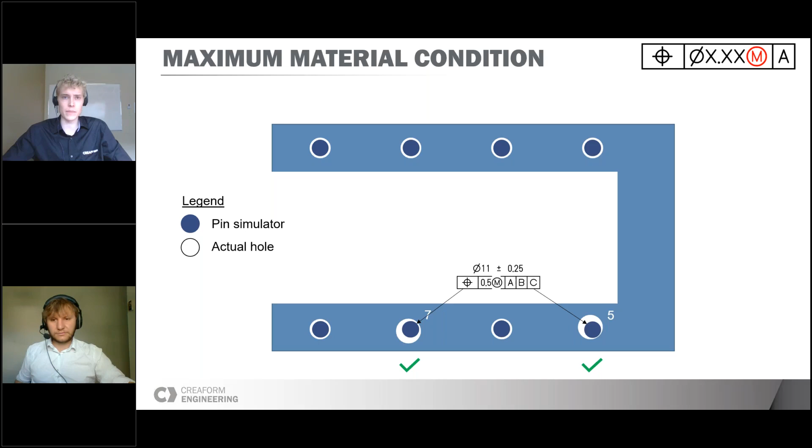Maybe a last question here: is it possible to apply MMC on threaded holes? It is possible in theory, but not usually recommended - I've never seen it in my practice. It's not usually recommended because typically it's difficult to measure with accuracy the position of threaded holes. You can do it with flexible hole location gauges, but usually it's not worth the trouble, and you're much better off applying it on actual, more measurable parts. The amount of bonus we would gain by that is also very small. So it's possible, but not worth the trouble.